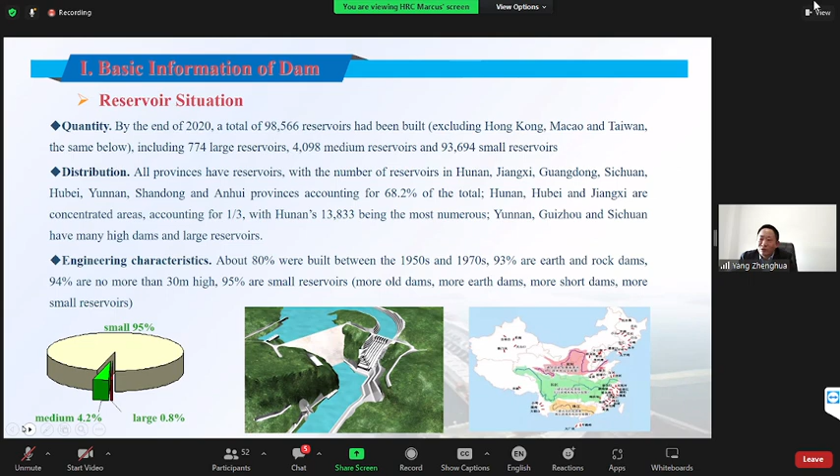So actually, we have a long history of building dams. Therefore, we'd like to give you 2 examples in ancient China. One is in Anhui province. The first one is Anfeng Pond, known as Quebei, one of the 4 major water conservation projects in ancient China. It was built around the Spring and Autumn period and has been used for more than 2,600 years.

And the second example is Fushan, where the Emperor Liang of the Northern and Southern dynasties organized 200,000 soldiers and civilians to build a dam in the stream of the Huai River. According to the historical materials, it was 3,742 meters long, 337 meters wide at the bottom, 108 meters wide at the top, and 48 meters high.

In the early stages when the People's Republic of China was just founded, according to the International Commission on Large Dams, in 1950 China had only 22 of the world's 5,196 dams more than 15 meters high. When it comes to modern ages, we take the Three Gorges Water Conservancy Hub on the Yangtze River as the example. We have created great achievement through the Three Gorges Dam. It's located in the mainstream of the Yangtze River. It's a world-renowned project. Next slide, please.

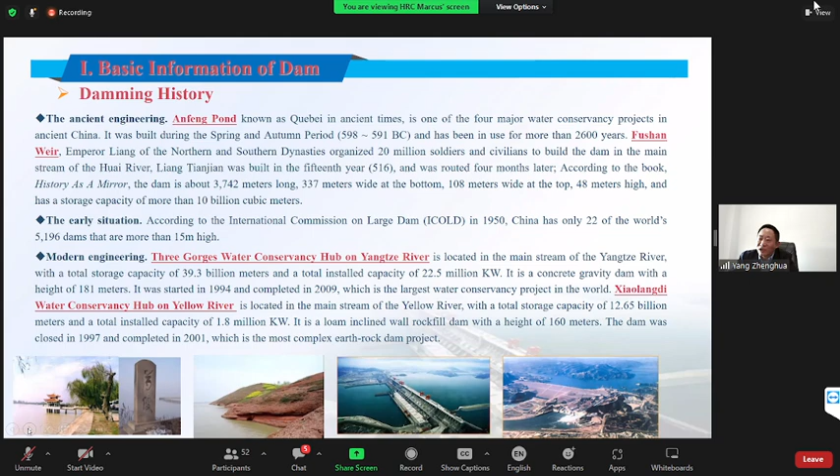When it comes to dam construction, according to a survey conducted about a decade ago, we have built 141 high dams over 100 meters, about 20% of similar projects in the world, and 13 super high dams over 200 meters, with a maximum of 305 meters. So a number of the world's firsts. For example, the world's highest arch dam, 305 meters, in Sichuan, which is the Jinping Level 1 hydropower station.

And Guangzhao in Guizhou, the world's highest roller-compacted concrete dam with 200.5 meters. The world's highest core wall rockfill dam is Nuozhadu in Yunnan with 261.5 meters. And the world's highest concrete face rockfill dam is Shuibuya in Hubei with 233.2 meters. When it comes to total storage capacity, the ranking is first Three Gorges Dam, then Danjiangkou, followed by Longyangxia, etc.

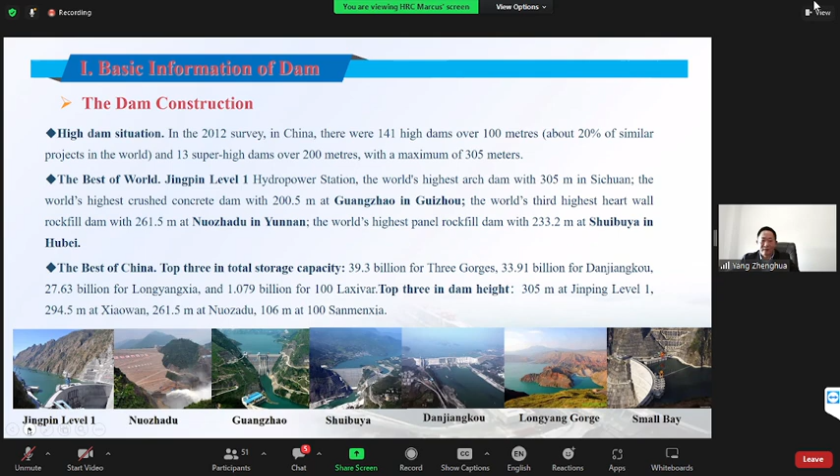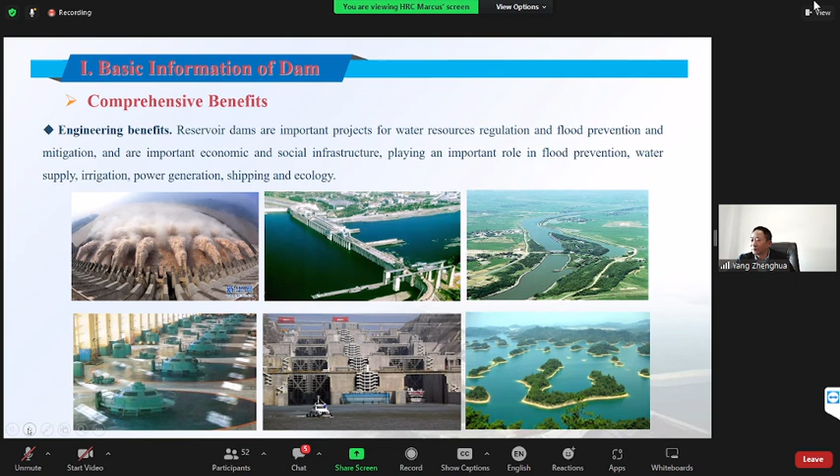When it comes to dam height, the top three are Jinping Level 1, followed by Xiaowan with 294.5 meters, and Sanmenxia, ranking number 100, still has 106 meters in height. So we know that dams are very important projects for water resources regulation and flood prevention and mitigation, and very important economic and social infrastructure. They play an important role in flood prevention, water supply, irrigation, power generation, shipping and ecology. The development of dams has made a great contribution to the country's economic development. Next slide, please.

The second part of my presentation will shed light upon the legal system of dams in China. Some background information. In Chinese, the connotation of safety, 安全: 安 is the absence of worry in the spiritual dimension, peace of mind, freedom from threat. 全 is integrity in the material dimension, preservation, freedom from damage. 安全 means safety, subjective freedom from distress and objective freedom from loss. As for the definition, safety means the steady state of the system.

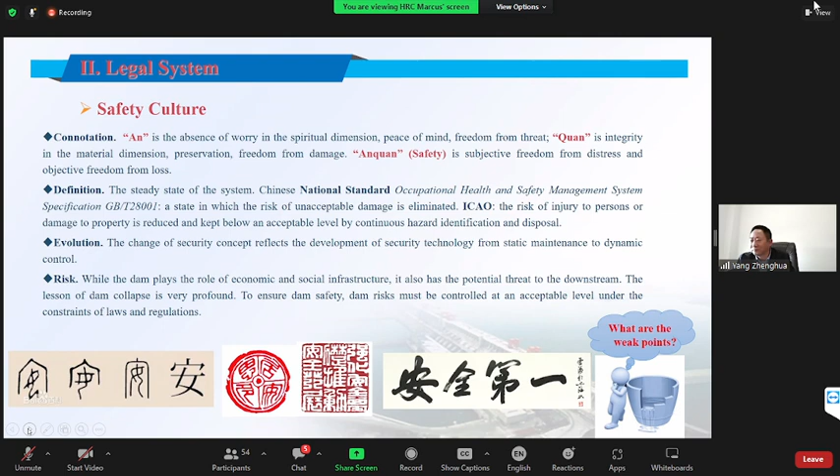The Chinese national standard defines it as a state in which the risk of unacceptable damage is eliminated. According to ICAO's definition, it means the risk of injury to persons or damage to property is reduced and kept below an acceptable level by continuous hazard identification and disposal. Such definitions have evolved over time. The change of the safety concept reflects the development of safety technology from static maintenance to dynamic control. As for risk, while the dam plays the role of economic and social infrastructure, it also poses a potential threat downstream. The lessons of dam collapse are profound. To ensure dam safety, dam risks must be controlled at an acceptable level under the constraints of laws and regulations.

So we can compare the experiences of China and the Swiss.

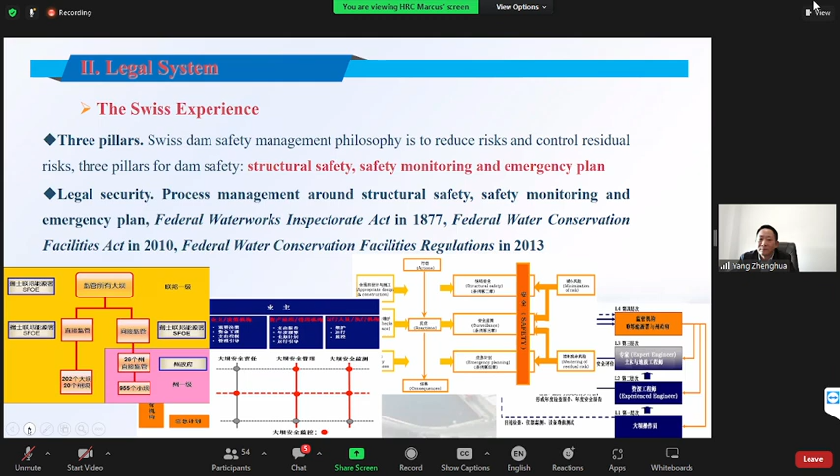Switzerland's dam safety management philosophy is to reduce risk and control residual risks. There are three pillars for dam safety: structural safety, safety monitoring, and emergency plan. Those three pillars are right in line with the three dimensions of safety management in China. In order to ensure the safety of dams, they set up a sound legal system, which includes a number of laws and regulations, including the Federal Waterworks Inspectorate Act in 1877, Federal Water Conservation Facilities Act in 2010, etc.

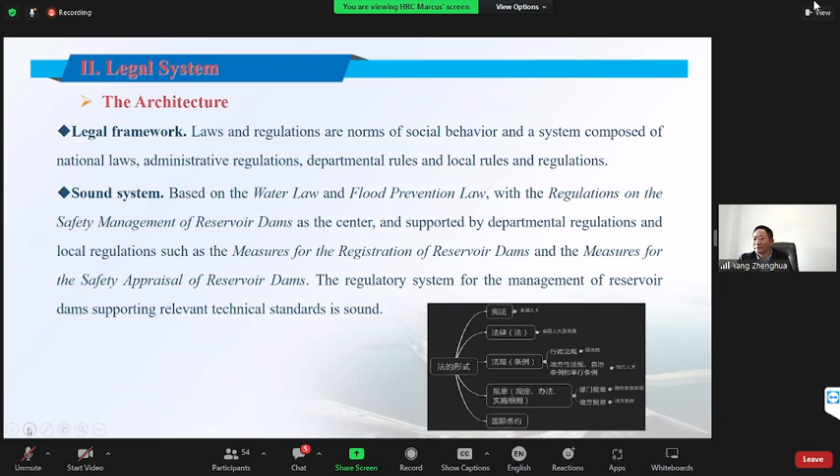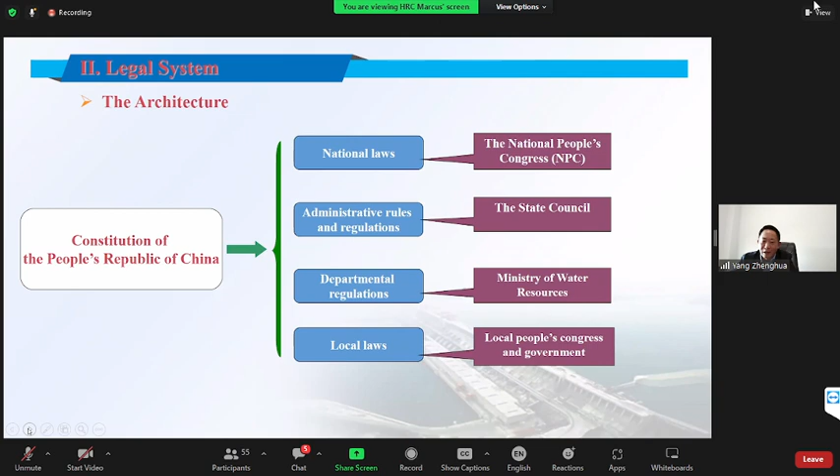When it comes to the legislative framework of China, we shall know that laws and regulations are norms of social behavior, and a system composed of national laws, administrative regulations, departmental rules, and local rules and regulations in China. In terms of laws or legislation about water, we base it on the water law and flood prevention law with regulations on the safety management of reservoir dams as the center, supported by departmental regulations and local regulations, such as the measures for the registration of reservoir dams and the measures for the safety appraisal of reservoir dams. The regulatory system for the management of reservoir dams supporting relevant technical standards is sound. This is the architecture of the legal system: the Constitution of the People's Republic of China, national laws in charge of the National People's Congress, administrative rules and regulations issued by the State Council, departmental regulations issued and managed by the Ministry of Water Resources, and local laws by the local People's Congress and government.

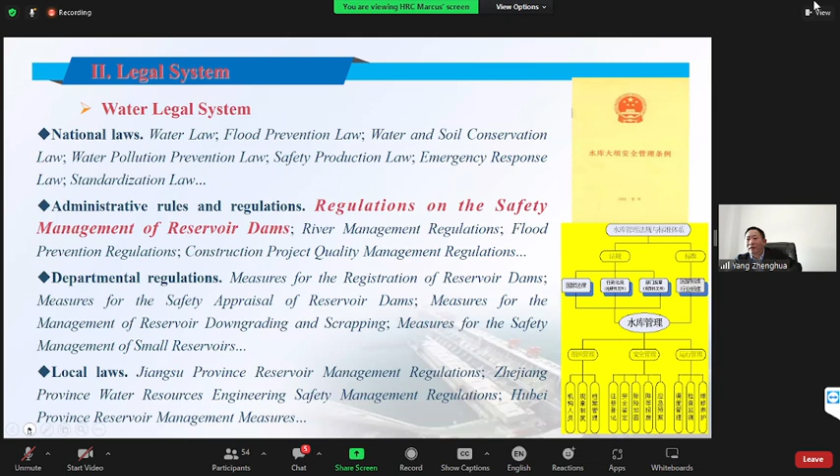When it comes to the content of the water legal system, national laws include the water law, flood prevention law, water and soil conservation law, water pollution prevention law, etc. Administrative rules and regulations include the regulations on the safety management of reservoir dams, river management regulations, flood prevention regulations, construction project quality management regulations, etc. Departmental regulations include the measures for the registration of reservoir dams, measures for the safety appraisal of reservoir dams, measures for the management of reservoir downgrading and scrapping, etc. Local laws include, say, Jiangsu Province Reservoir Management Regulations, Zhejiang Province Water Resources Engineering Safety Management Regulations, Hubei Province Reservoir Management Measures, etc.

So when it comes to the relevant requirements for the laws and regulations on water: the water law is the fundamental principle of reservoir management, which clarifies the requirements of water resources development, utilization, protection, and management, the requirement of water engineering safety, risk removal, protection, and supervision, and the relevant legal responsibilities. The flood prevention law is the basis of reservoir flood control, which clarifies the requirements of construction and application, control and protection, flood control and rescue, emergency guarantee. The water and soil conservation law is the legal basis of reservoir siltation prevention, which clarifies the requirements of soil and water loss construction, prevention, control, and supervision.

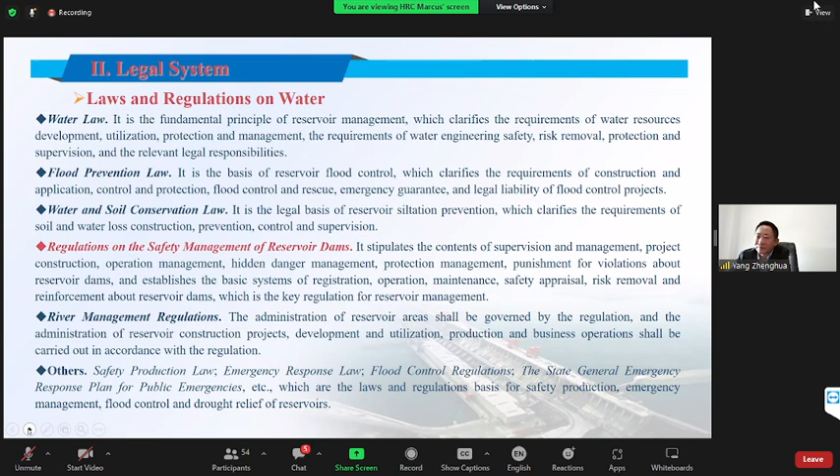Regulations on the safety management of reservoir dams stipulate the contents of supervision and management, project construction, operation management, hidden danger management, protection management, and punishment for violations about reservoir dams, and it establishes the basic system of registration, which we will provide a specific session on tomorrow. River management regulations govern the administration of reservoir areas, and the administration of reservoir construction projects, development and utilization, production and business operations shall be carried out in accordance with regulations. Others include the safety production law, emergency response law, flood control regulations, the state general emergency response plan for public emergency, etc., which are the laws and regulations basis for safety production, emergency management, flood control, and drought relief of reservoirs.

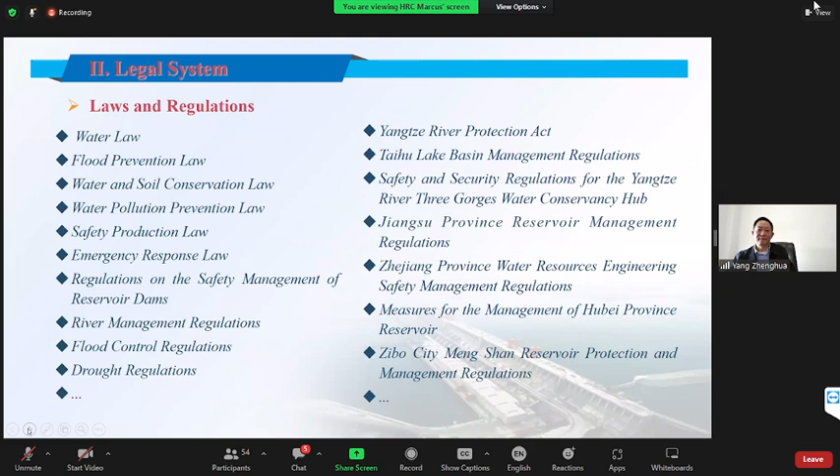This is about the catalogs of the laws and regulations. Apart from those we have just mentioned, it also includes some specific project-based laws and regulations, including, say, the Yangtze River Protection Act, Taihu Lake Basin Management Regulations, Safety and Security Regulation for the Yangtze River Three Gorges Water Conservancy Hub. It also includes some local laws and regulations in terms of protection, for example, Zibo City Mengshan Reservoir Protection and Management Regulations is one of the examples.

The next slide is about the common regulations following the departmental rules. That has covered part of what I've just mentioned. It also includes some recently published and launched laws and regulations, which I won't dwell on. This slide is mainly talking about how we build around the regulations about water conservancy by the Ministry of Water Resources.

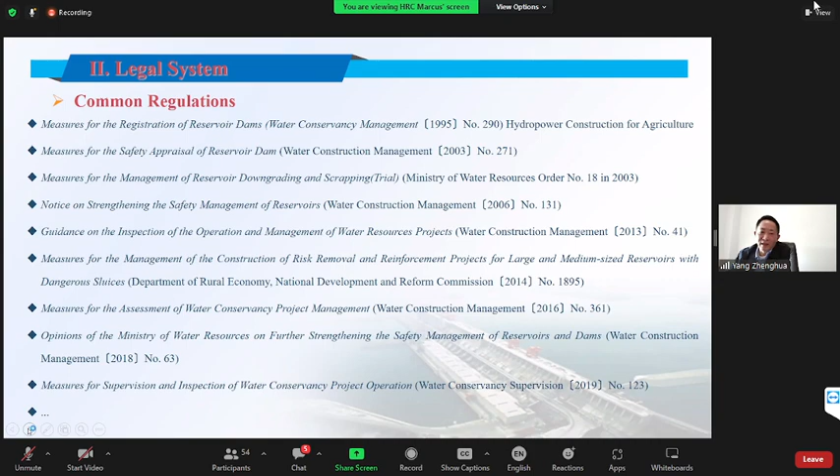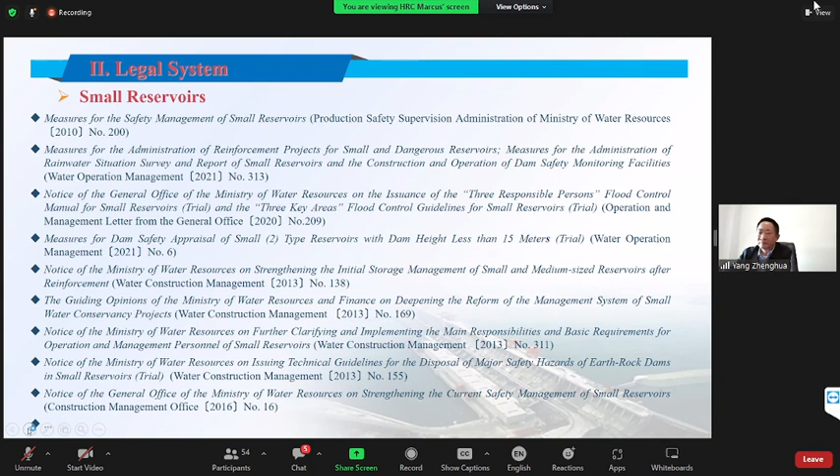So the third part of my presentation is devoted to the management system.

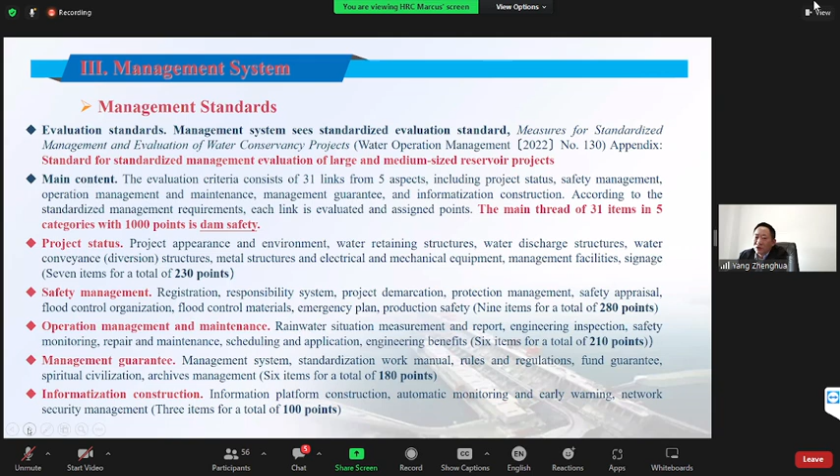This slide is about the key system across the 5 aspects, 31 items in total, and we have listed out some of the highlights - we call it the 10 management points. The first is organization and management, subject of responsibility, including the responsibility, institution, and systems. The second is about registration, including the declaration, examination, approval, and certification granting, etc. The third is scheduling and operation - the regulation schemes and flood prevention.

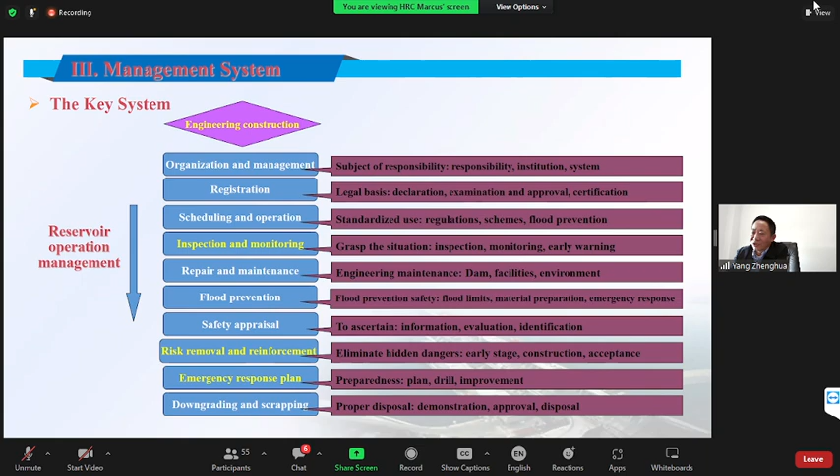They are the highlights. The next slide is about the management system, how we do inspection and monitoring - how targeted are our top 3 pillars of the works in China. I'd like to highlight 3 highlights out of the 10 - the first one is inspection and monitoring.

In terms of inspection and monitoring, we use machines and manpower to do the monitoring against the facility to detect abnormalities in the projects and respond to emergencies, and also provide prevention of such emergency incidents. In our management rules, we provide certain rule amendments against it.

The monitoring is designed in line with the different types of dams and reservoirs. In terms of frequency of inspection and monitoring, we have monitoring at the preliminary stage, the intermediary stage, and the post-operation stage, with different frequency requirements. In the intermediary stage we have the highest frequency of monitoring, which represents that this is a very important stage of the project because it will expose a lot of risks. So monitoring and inspection serves a very important role in this regard.

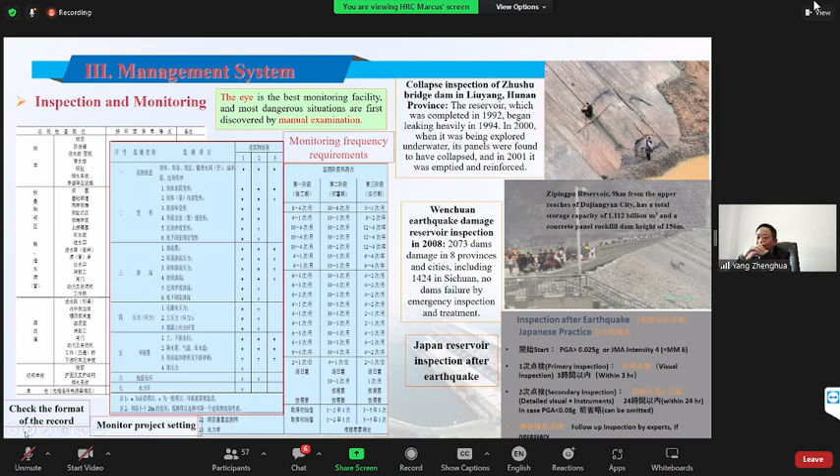From the perspective of monitoring and early warning, currently we have improved our technology. We could use remote sensing technology, drone technology, and also underwater inspection facilities to do the monitoring.

Because of new technologies such as internet technology and digitalization, we could do better work in early warning. At present, we could adopt technologies such as AI, digital twin, and other big data technologies to better do our work.

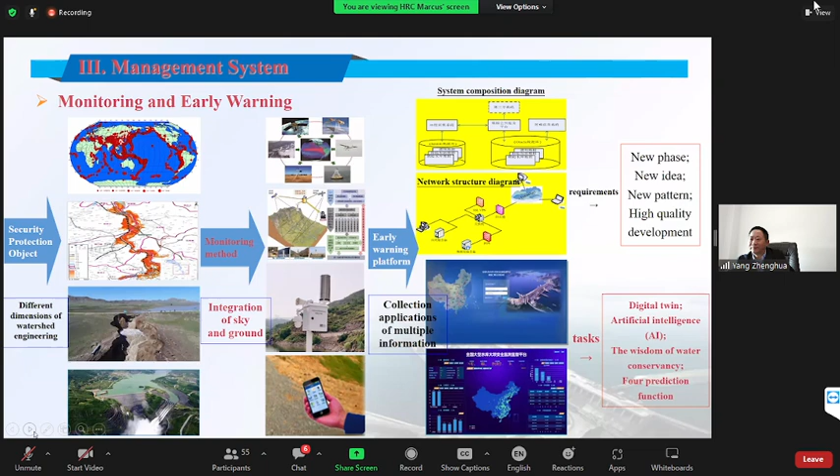This is about risk removal and reinforcement for existing reservoirs. They will have some problems because of natural reasons and also daily operation, so we have to remove the risk and then reinforce their operation.

For a lot of projects built from 1950 to 1970, they were not that strong because of the limits in technology and technical guidance. So later we have done large scale risk removal and reinforcement, focusing on about 70,000 reservoirs, accounting for 80% of the total.

Our work has continued to the current period, which we call the 14th Five-Year Plan period. In this plan, we focus on the existing reservoirs.

Currently our focus is on risk removal and reinforcement, and on improving our normalized mechanisms, mainly to reinforce the existing reservoirs and also to equip them with better technologies.

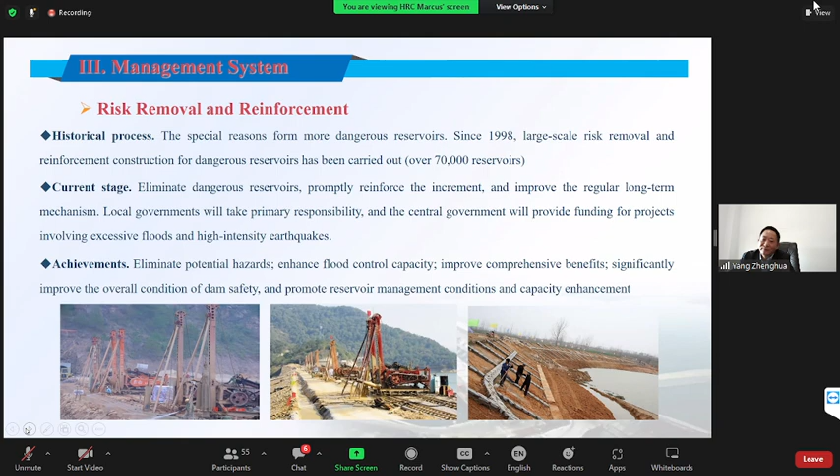Here I'm going to elaborate on emergency preparedness. From an international perspective, emergency preparedness is a widely adopted system for reservoir and dam safety management, and it is quite important for international standards.

In a study by the World Bank about dam safety laws of 22 countries in 2002, 14 laws require owners to prepare dam emergency plans. Some require only high-risk dams to have emergency plans and review them regularly.

Some suggest that emergency plans should be prepared in consultation with affected communities and stakeholders. Approval of emergency plans is a condition for obtaining dam operating permits in some countries.

This is the international practice, and for the regulation in China, in accordance with the emergency response law and the guidelines for the preparation of emergency plans for reservoir and dam safety, owners are required to do well in event analysis, organization and command, emergency response.

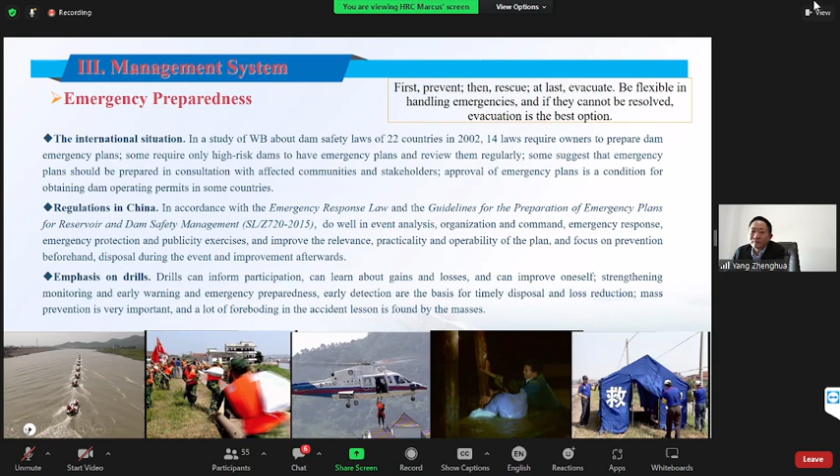For emergency preparedness in the field, fleeing could actually be the best way to deal with such situations. As you can see from the top photos, these are drills for emergency preparedness here in Zhejiang Province.

Here we also have other management systems. First, scheduling and application: the operation of a reservoir should be standardized with requirements for the preparation of dispatching regulations and dispatching application plans.

We also have certain requirements. For example, attention should be paid to operation not exceeding the flood limit water level during the flood season, and not exceeding the normal storage water level during the non-flood season. We should also combine emergency management requirements with emergency dispatch content.

This covers some of the scheduling and application system. Let's move on to the safety appraisal, which is in order to master dam safety.

And for this part, it is to carry out dam safety assessment regularly according to the measures for the safety appraisal of reservoir dams, and it should be carried out every 5 to 10 years. And also we have the dam safety guidance. Later we're going to have another lecture for this part specifically. After the assessment, the competent department puts forward appraisal opinions, defines the dam safety grade and the safety situation, and points out the existing problems and the solutions. This is about the safety appraisal.

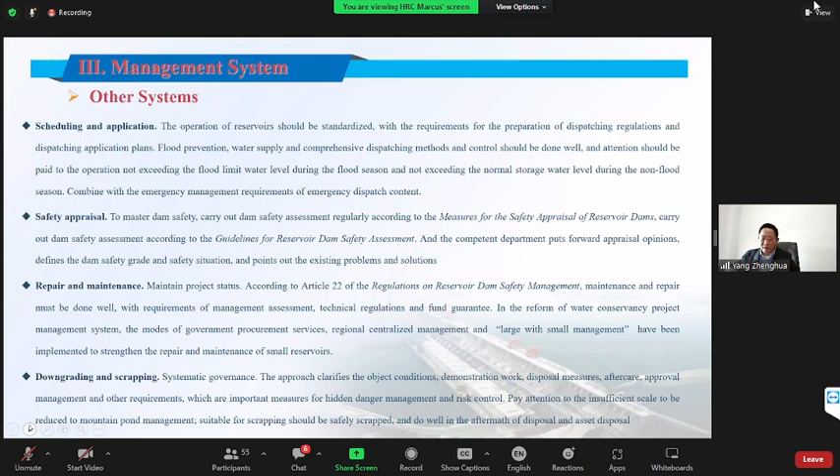And if the legal system is for our management, then the technical standards are going to set the standards for our technical practice. For the concept of a standard in the technical part, it is a normative document developed by consensus, approved by recognized bodies, and used jointly and repeatedly in order to achieve optimum order within the limits.

China has a long history in the standardization of technical standards, in the Qin dynasty. We have the parts for the vehicles, and also the technical standards for its manufacturing, and these standards have been recognized by the international society. Standardization was first set by the Western countries in the era of industrialization, and currently we have standardization to support advanced economic and social development. Here we have different standards, for technology, management, and work. And also we adopt some of the international standards.

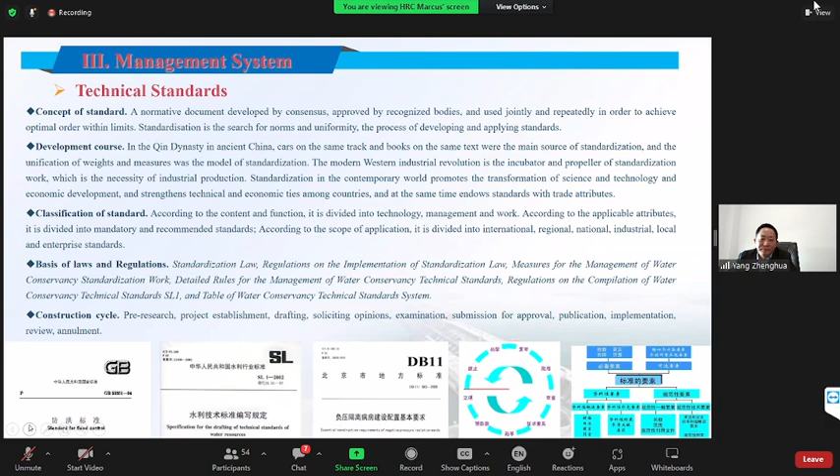To make sure of smooth management from construction, operation, maintenance, and emergency, we have a set of these standards. This is quite a large volume of technical standards. Those are the common technical standards, for flood prevention, hydraulic and hydroelectric work, flood standards, and preparation of reservoir operation regulations. Currently, we have 500 to 600 hydraulic technical standards.

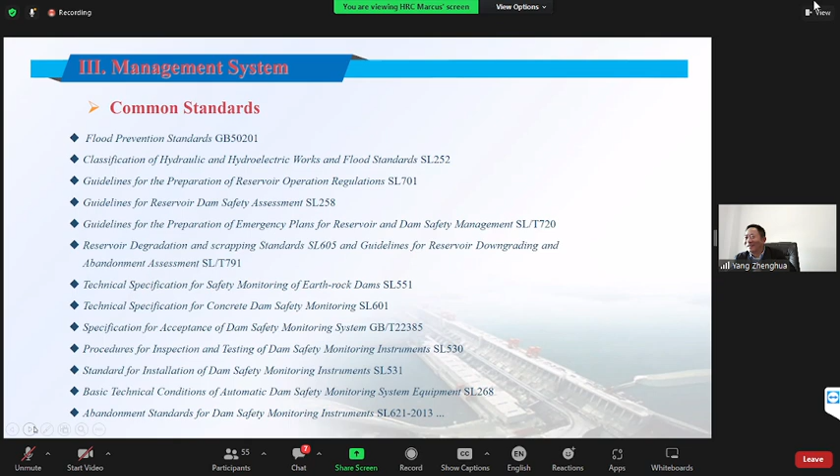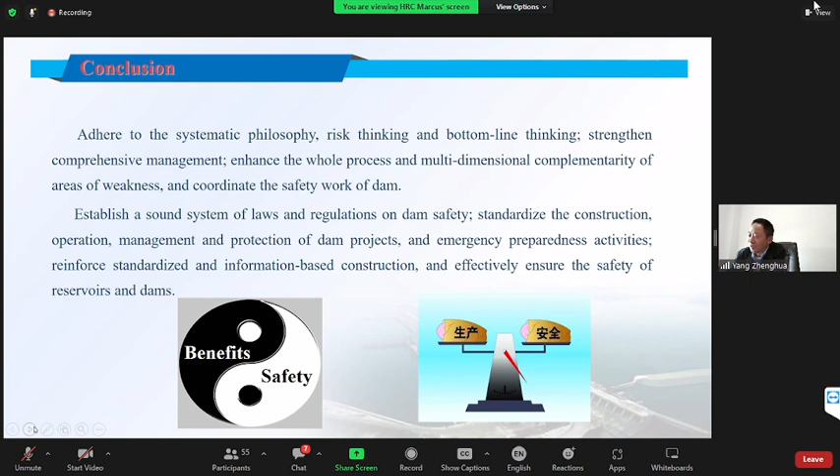In the course of management, we adhere to the systematic philosophy, risk thinking, and bottom line thinking, strengthening comprehensive management, enhancing the whole process, multi-dimensional complementarity of areas of weakness, and coordinating the safety work. So we're going to walk the walk and make sure of safety.